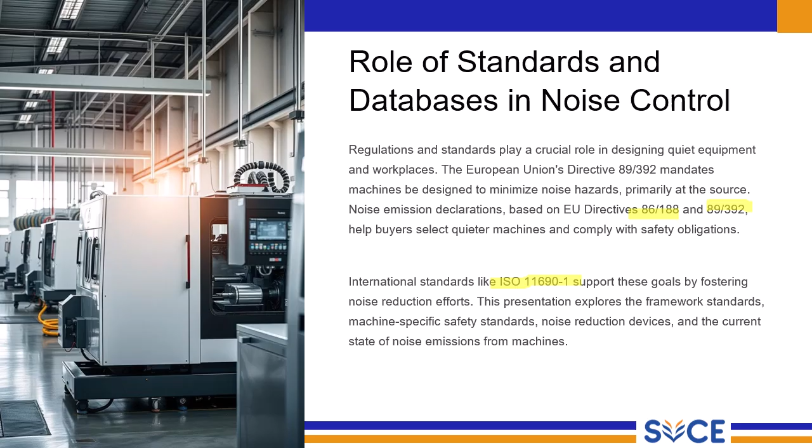The framework standards for noise measurements on machines are very important work that governs how we accurately measure noise emitted by the machines. This is a critical step in ensuring fair comparisons and effective noise control strategies.

The determination of sound power, a key metric for characterizing the total acoustic energy radiated by a machine, primarily follows the ISO 3740 series of standards; especially ISO 3744 and ISO 3746 are important. These standards meticulously specify measurement surfaces, precise locations of measurement points, necessary environmental corrections to account for the testing environment, and the underlying principle of uncertainty in the measurements. This ensures a standardized and rigorous approach to quantify sound power outputs.

Complementing sound power measurement are the emission sound pressure levels, which are measured according to the ISO 11201 to ISO 11204 series. These standards focus on the sound pressure at specific operator or bystander positions. Notably, ISO 11204 provides a detailed method for precise environmental correction, enhancing the accuracy of this measurement.

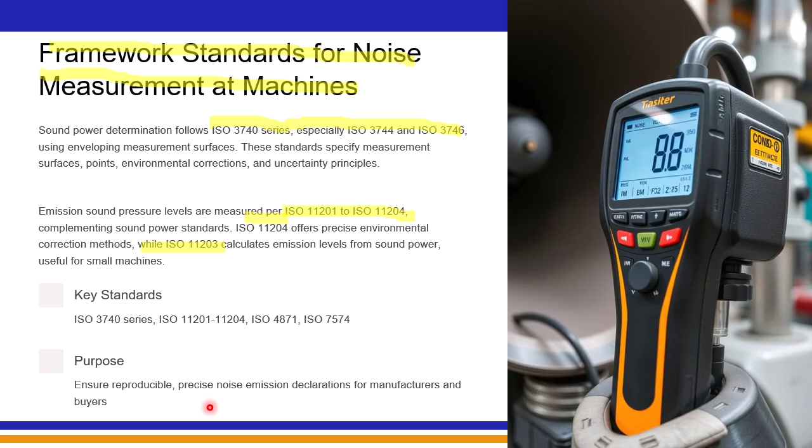Now, let's focus on the practical output of these measurement standards: noise emission declarations. These declarations, which are mandatory in Europe, serve as a crucial tool for evaluating the noise quality of machinery and driving noise reduction efforts right at the source. They provide essential data that underpins accurate noise impact forecasts and effective planning of workplace noise control measures.

As outlined here, these declarations are comprehensive documents. They typically include key information such as the specific machine model, operating conditions under which the measurements were taken, measured A-weighted sound power levels, which account for human hearing sensitivity, emission sound pressure levels at designated operating positions, and importantly, associated uncertainties in these measurements. The ISO 4871 standard provides specific examples of how this information is presented.

The key components you can expect to find in a noise emission declaration are highlighted here. These include clear machine identification, the measured noise levels themselves, uncertainty values associated with those measurements, which provide an indication of the reliability of the data, and the specific operating modes of the machine during the testing.

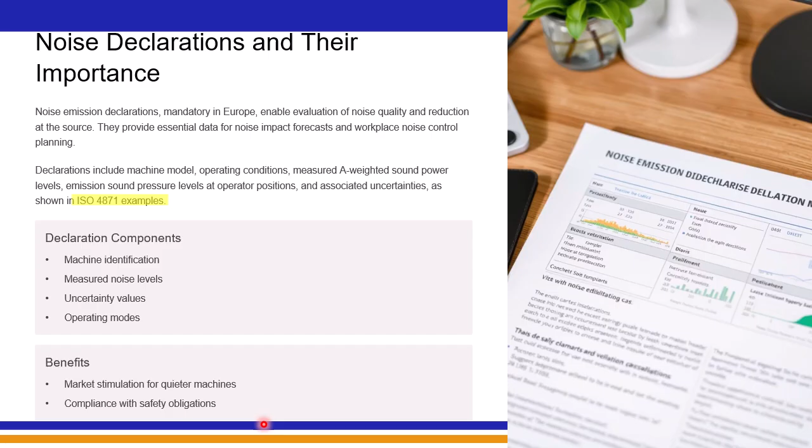Beyond the general framework standards, we also have machine-specific safety standards that include dedicated sections addressing noise-related hazards. These standards are crucial as they provide targeted guidance for recognizing and avoiding noise hazards associated with particular types of machinery, ultimately contributing to improved machine safety overall, aligning with both European and international directives.

These safety standards typically feature specific noise reduction measures that should be considered in the design process, clearly defined noise emission values that the machinery must meet, and importantly, verification procedures that reference achievable emission levels. These procedures often follow principles outlined in standards like ISO TR 11688-1 and ISO 11689, ensuring a consistent and evidence-based approach to noise control in machine design.

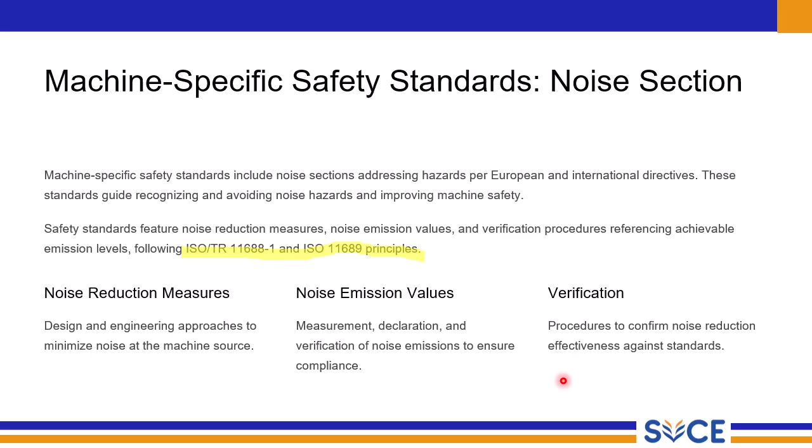Finally, verification refers to the procedures put in place to confirm the effectiveness of the implemented noise reduction measures against the relevant standards. This ensures that the design efforts translate into tangible reductions in noise emissions and contribute to a safer working environment.

Now, shifting our focus from noise measurement to noise reduction, we have framework standards that guide the planning and design of inherently low noise machines. The ISO TR 11688 series, specifically Part 1 and 2, provides a structured approach encompassing various stages from the initial design task and concept phase right through detailed design and prototype investigations.

To achieve these lower noise emissions, noise control devices such as silencers, enclosures, and absorbers are often integrated directly into the machine design. The effectiveness of these measures is then reflected in the resulting noise emission values. Further, to aid this investigation process, CAD-compatible examples and computational methods are highly used to support seamless incorporation of noise control features into the overall machine design.

The ISO TR 11688 framework essentially outlines a systematic process for designing quieter machines. It begins with the design task specification, where relevant standards, the current state of the art in noise reduction, and specific noise requirements for the machine are clearly defined. Next, in the concept phase, problem-solving principles related to noise control and fundamental acoustics of the machine are considered to develop initial design concepts that inherently minimize noise generation and propagation.

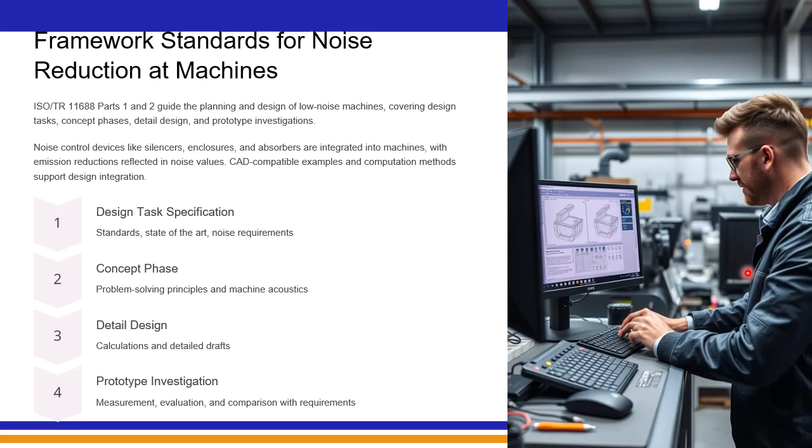Following that, the third phase is detailed design. This stage involves detailed calculations and creation of precise engineering drafts that incorporate chosen noise reduction measures into the machine construction. The final phase is prototype investigation. This very crucial step involves actual measurement and evaluation of prototype noise emissions. These measurements are then rigorously compared against initial noise requirements to verify the effectiveness of the implemented noise reduction strategies. This iterative process ensures that the final machine design meets desired noise performance levels.

Let me talk about standards that specifically address noise control devices and materials. These are the tools in our acoustic toolbox, such as enclosures, absorbers, silencers and baffles. As you can see, there are dedicated ISO standards for each of these categories. For enclosures, which aim to physically isolate the noise source, relevant standards include ISO 11546 and ISO 11957. For absorbers, which work by dissipating sound energy, we have ISO 11654 and ISO 10534.

Silencers designed to attenuate airborne noise are covered by ISO 7235 and ISO 11691, along with ISO 11820 and 14163. Finally, for noise baffles, which are often used to break up the sound path and reduce reverberation, relevant standards are ISO 11821 and ISO 10053. This section provides a visual representation of these key noise reduction elements.

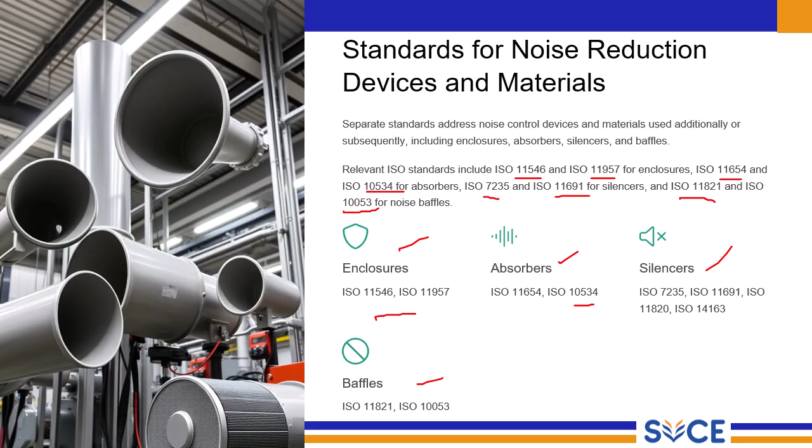Let's take a look at the current state of noise emission from various types of machines. ISO 11689 plays a key role here, as it describes the methodologies for the collection, presentation, and evaluation of noise emission data. This standard helps in defining different emission groups, relevant emission values such as sound power level, emission sound pressure level, applicable measuring standards, and the criteria for data representativeness.

Effectiveness of noise control performance is often assessed using emission values, sometimes denoted as L1, L2, L3. Generally, lower values indicate better noise control. For instance, German VDI-ETS guidelines provide specific emission data for various machine groups, offering valuable benchmarks. Examples include woodworking machines and metal cutting machines, giving us a snapshot of typical noise emission ranges in these sectors.

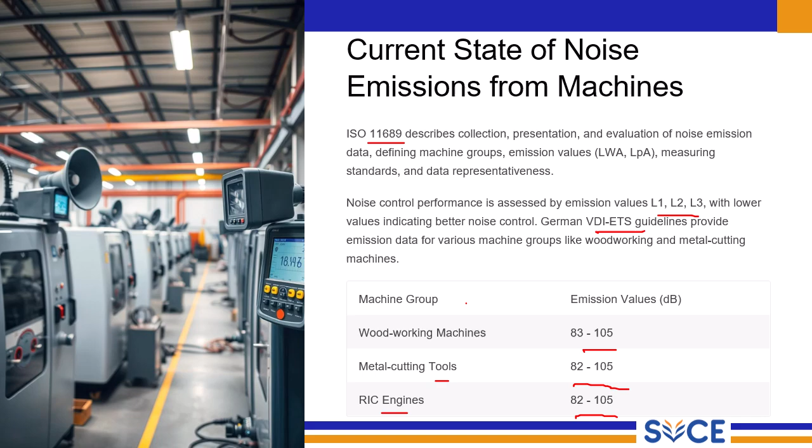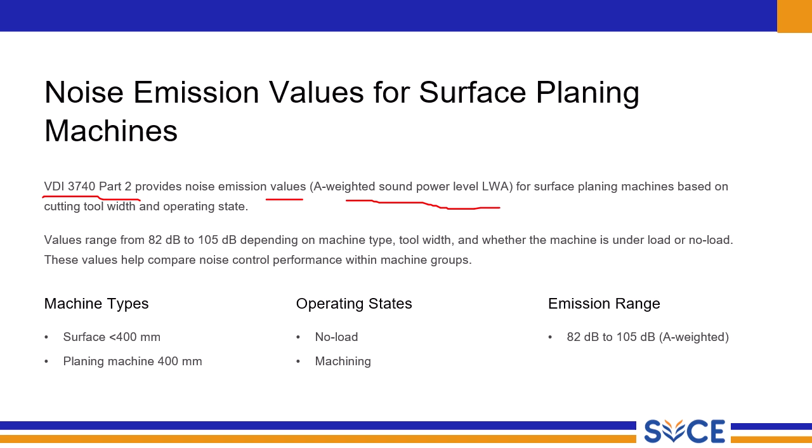Let's zoom in on a specific type of machinery, surface planing machines. Here, VDI 3740 Part 2 provides valuable noise emission values, specifically A-weighted sound power level or LWA for these machines. These values are categorized based on factors such as cutting tool width and operating state of the machine. As you can see, noise emission values for surface planing machines range from 82 decibels to 105 decibels.

This variation depends on several factors including the specific type of machine, the width of the cutting tool, and crucially whether the machine is operating under load, meaning it is actively machining material, or it is running under no load conditions. This specific emission value provides a more granular way to compare the noise control performance within its particular group of machines.

We can observe that the machine types considered here include surface planers with a cutting width of less than 400 mm and planing machines with a 400 mm cutting width. Operating states are categorized as either no load, meaning the machine is running but not cutting or machining, or load, when the machine is actively engaged in material removal. Across these different machine types and operating states, the overall emission range is consistently reported as 82 to 105 decibels. This underscores the importance of considering both machine specification and its operational mode when assessing and comparing noise emissions.

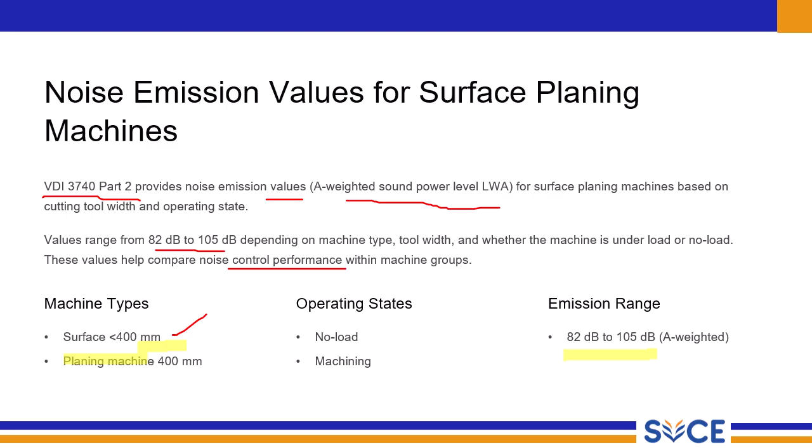As we reach the end of the noise rating standards and regulations, let's take a moment to summarize the key takeaways. Firstly, we have seen that standards and regulations are absolutely essential in our effort to reduce noise hazards originating from machines. They provide a crucial framework that guides the entire process from the initial design considerations to the accurate measurement, clear declaration, and thorough verification of noise emissions. Secondly, we have highlighted the importance of machine-specific safety standards and structured noise reduction frameworks. This supports the creation of safer and quieter workplaces by providing targeted guidance for different types of machinery and outlining systematic approaches to minimize noise generation.

Further, we have learned that noise control devices and materials themselves have dedicated standards that ensure their effectiveness in attenuating sound. Finally, we have explored how current noise emission data and associated guidelines are vital for benchmarking the noise performance of different machine groups. This data enables us to compare noise levels, track progress, and drive continuous improvement in noise control performance across various industries. In essence, comprehensive understanding and application of these noise ratings, standards, and regulations are fundamental to creating healthier and more productive work environments by effectively mitigating the risks associated with excessive noise.